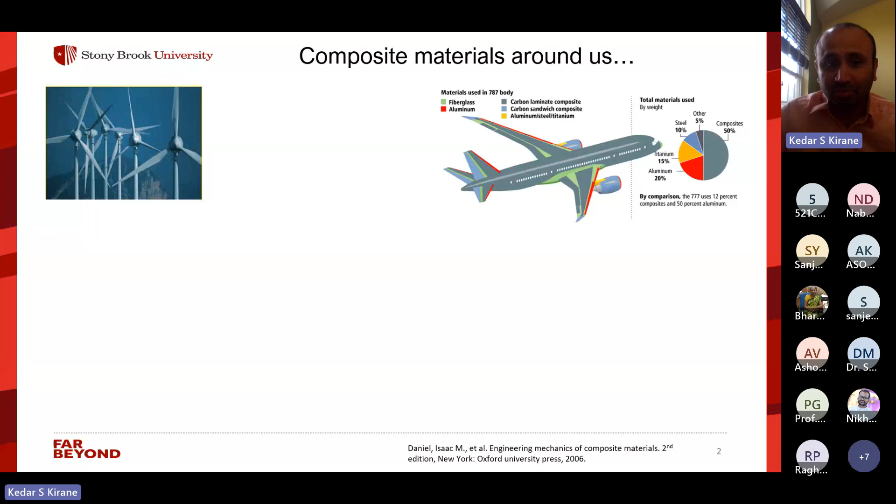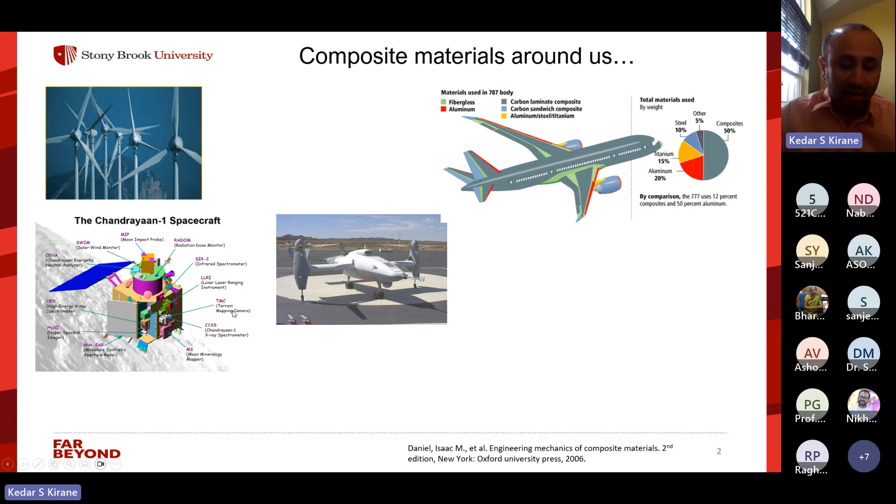We all know that today we are surrounded by fiber reinforced composites in many applications, like wind turbines. In the Boeing 787, actually 50% by weight is composites today. A lot of aircraft, the space science field, also use a lot of composites, as well as the automotive industry, boats, recreational applications, and defense applications. The main reason for that is composites are very lightweight, yet at the same time strong and stiff. So they have excellent mechanical properties, which has led to their widespread application in all these various fields.

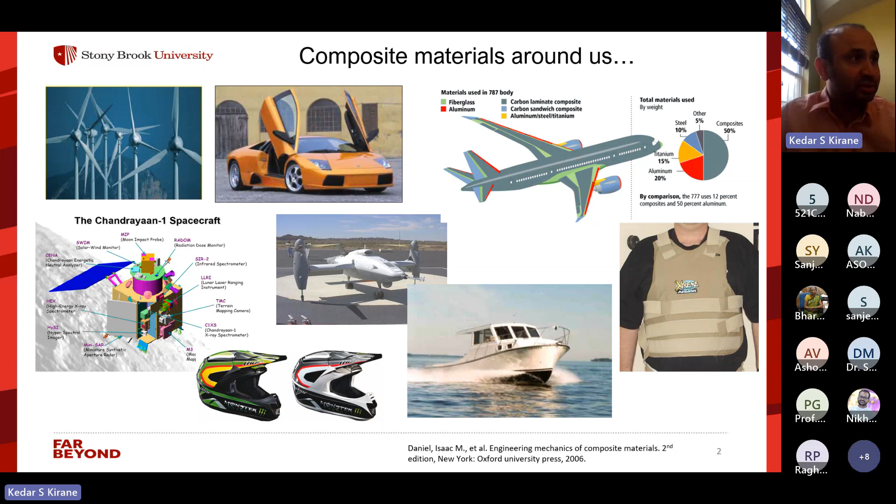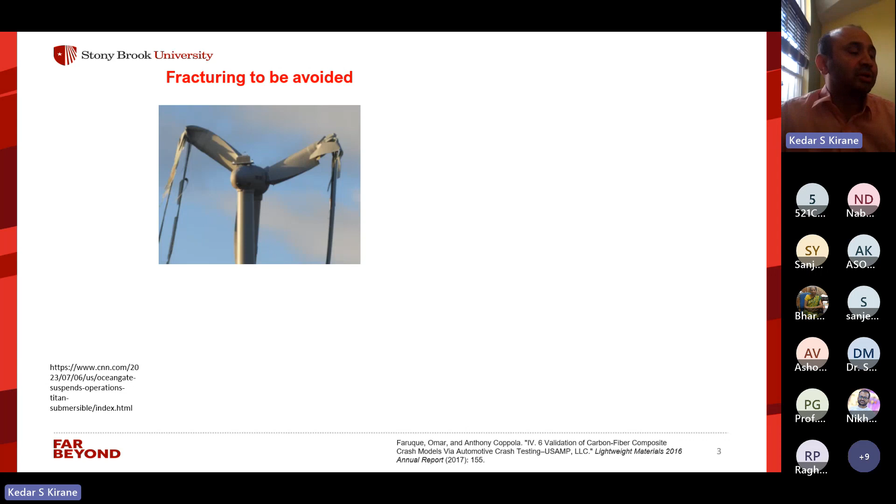But the main thing to realize is that we have to understand the fracturing behavior very well, and not only understand it but also be able to predict it, so that we can avoid failures. A recent example which may resonate with everyone is the recent failure of the OceanGate Titan submersible, which was made mainly from a carbon fiber reinforced composite, and it ended up a big disaster—several people died. So these are the things that need to be avoided.

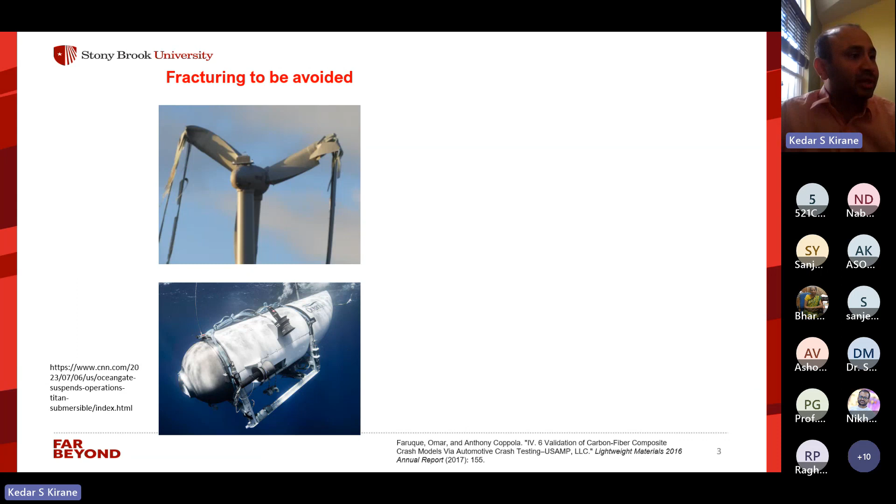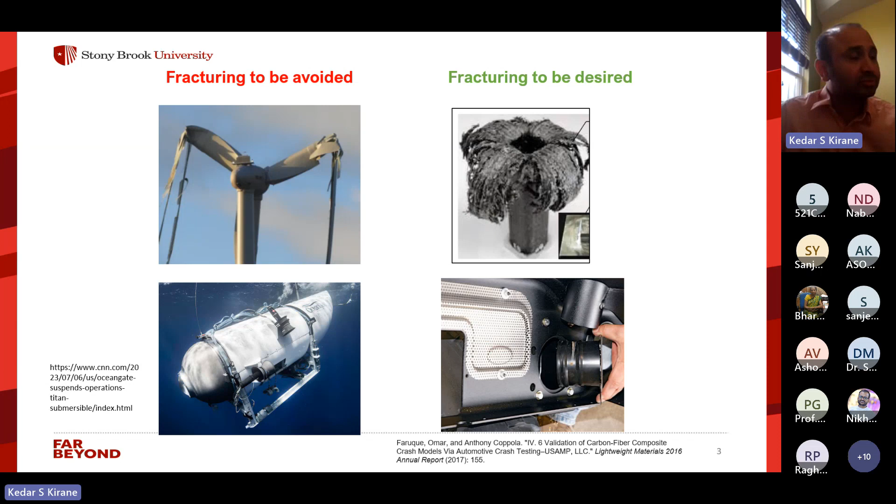So a little bit more about the OceanGate. There are many articles out there in the media, and a lot of speculation about what went wrong. I will just briefly try to discuss the main points here.

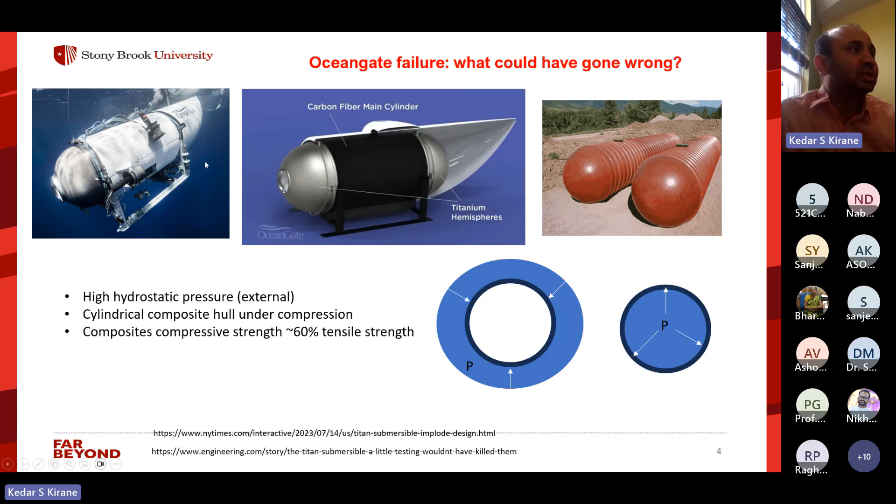So in this design, it was a bit of a new concept. Conventionally these kinds of vessels are made from a titanium alloy, but the company OceanGate decided to make it with a carbon fiber composite instead. The overall structure had a main cylinder at the center made from the composite, with epoxy matrix and carbon fiber reinforcement, and two titanium end caps, giving the overall shape shown here.

A lot of people believe the problem with this design is that while composites are great for many applications involving mainly tension, in designs where most of the stress is compressive, they may not be a great choice. To explain, look at this pressure vessel image. If there is pressure inside, everything is under tension, and for these applications composites work great - they're lightweight with high tensile strength, no problem.

But if you reverse it, pressure from outside to inside, as was the case with OceanGate, the entire structure is under some kind of compression, not uniaxial but multi-axial compression. That is often a limiting factor for composite design, because they consist of long fibers, and when these are compressed, they tend to fail by a micro-buckling instability. That's what I'll talk about mostly today.

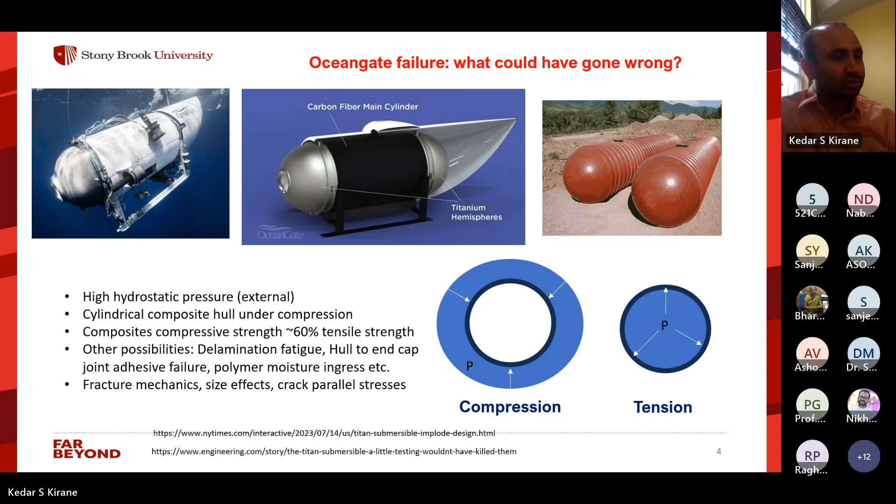Composites are generally made into lamina, or layers, which are then stacked with different orientations. Each layer is most commonly a unidirectional lamina where all fibers run in one direction, making it very anisotropic. To mitigate this anisotropy, it's common to use layers running in different directions, for example 0, 45, minus 45, 90. Overall, this stack, called a laminate, has a quasi-isotropic behavior.

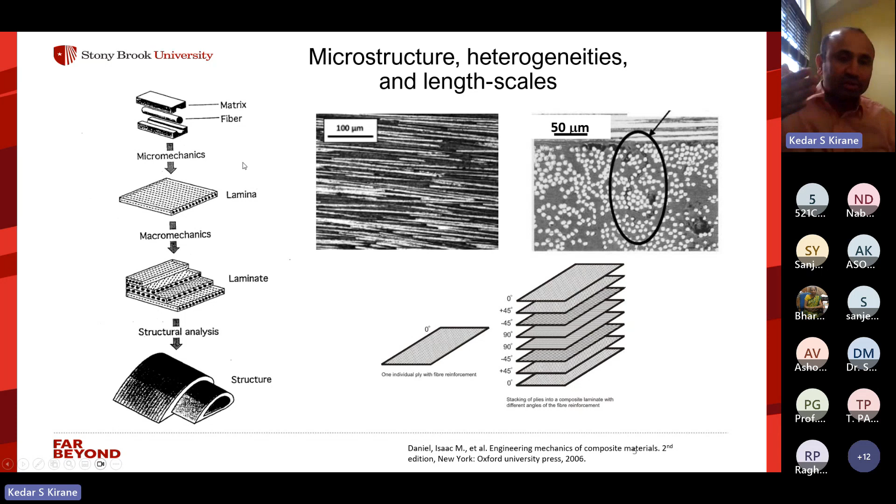But this layering also leads to another kind of heterogeneity because it's still joining dissimilar layers. So there are several length scales involved, all the way from the individual constituent level with matrix and fiber, to a single layer, to a stack of layers used in structures. An important thing to understand is how failure happens, and how it scales as we go from smaller to larger length scales.

One important point, probably the most important in understanding this scaling, is the so-called quasi-brittleness of composites. Failure can mainly be of two types: brittle or ductile. When brittle, at a sharp crack tip, damage is confined to almost a point - negligible in size. For ductile materials like metals, there's a plastic zone that is not negligible. But quasi-brittle materials such as concrete, rocks, and also fiber-reinforced composites have a damage zone at the crack tip whose size is not negligible compared to the size of the specimen itself.

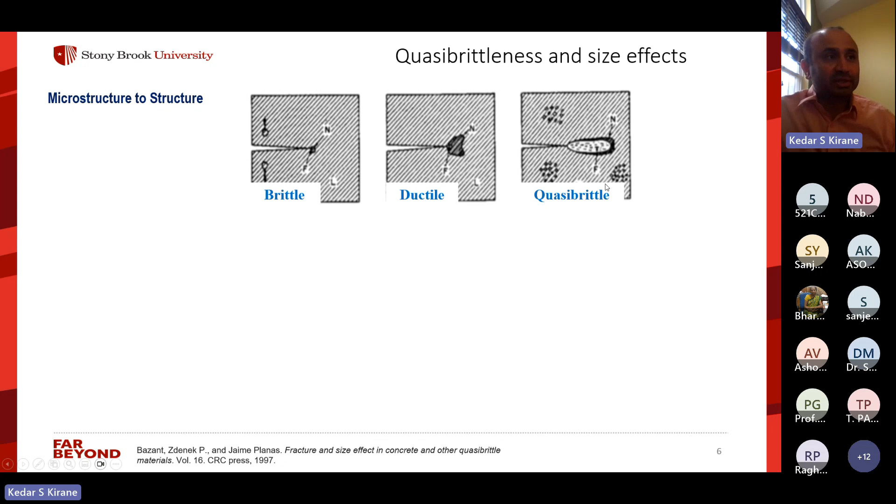Understanding this process - this is called the fracture process zone. The process zone size is usually more or less constant, so depending on the length scale we are operating at, the role played by the process zone increases or decreases in importance. For very small scales, probably everything is the process zone, so then it is extremely important. For very, very large sizes, the process zone is negligible, so then the behavior can be classified as brittle. In this intermediate range, maybe laboratory dimensions, the process zone is of moderate size but still not negligible, so it plays an important role. Understanding this transitional role is very important, not only in modeling it, but also in characterizing the fracture behavior.

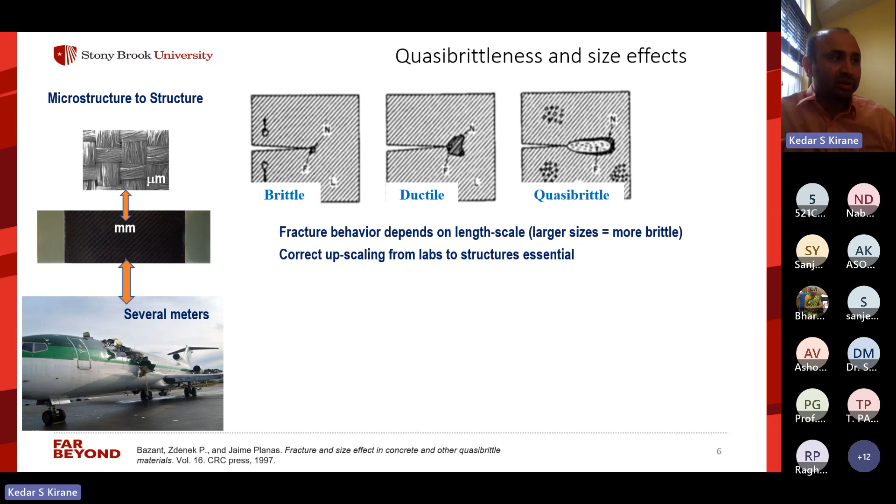So essentially the behavior depends on the length scale. Larger sizes are more brittle, and so the scaling from labs to structural size is very tricky. Now, one of the things that happens with changing size is that the stability of the post-peak behavior changes. For example, smaller specimens are often more stable in the post-peak region, and larger specimens become more unstable.

There is a very important concept called the size effect law, which basically says that larger structures have smaller strength, nominal strength. This is not the material strength - material strength is a constant, but the specimen strength, which is the total load divided by some kind of nominal area, that decreases with increasing size.

This is also the prediction of linear elastic fracture mechanics, of course. But if you consider linear elastic fracture mechanics, which applies to purely brittle failures, the scaling of strength versus the size D plotted on this will show almost a linear plot with slope of minus half. But what happens because of the process zone is that the scaling deviates from this straight line. This deviation is described by this empirical law, called the size effect law, which was first developed by Professor Bazant, who was also my PhD advisor.

This is the well-known form of the size effect law, where sigma n is the nominal strength of the specimen, and d is the size of the specimen. It has two constants: one is sigma 0, which represents the strength at zero size, as d goes to 0, and d0 is a length scale parameter related to the size of the FPZ. So when you have a non-negligible FPZ or process zone, you have this transitional behavior of the strength size effect, and when the specimen size becomes really small, this size effect vanishes.

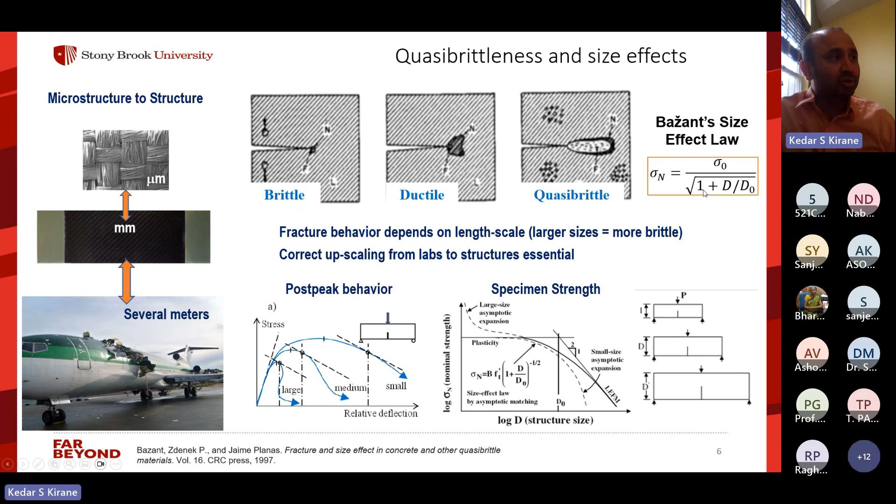Understanding the size effect is really, really important for most materials, including composites. Now, a little bit more about this size effect law - this is basically how it looks, where the strength decreases with size, and in this intermediate region a length scale has to be introduced. It is not self-similar, and then at very large sizes it becomes what LEFM, or linear elastic fracture mechanics, describes.

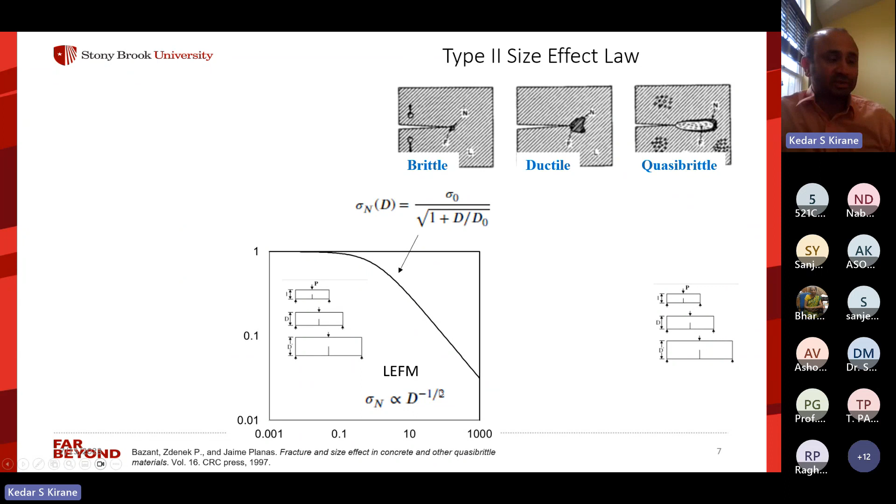Now, an important consequence of this is that if you are in this region - the x-axis is size D - if you test the specimen in the lab for fracture toughness, you will actually see that the fracture toughness becomes size dependent, or appears to be size dependent. This can easily be seen by just rewriting the size effect law in terms of fracture toughness, and you can see that this becomes a size dependent equation for Kc, the fracture toughness. It actually increases with size, and only for very large sizes does it become constant, which is what fracture mechanics tells us - that fracture toughness is a constant parameter.

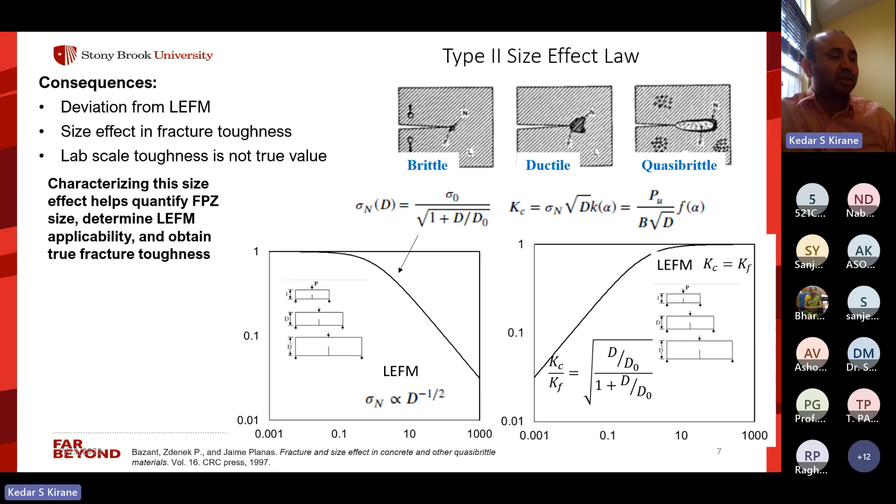So if you do a test for a size somewhere in this intermediate region, that fracture toughness will not be applicable to large sizes or small sizes. It is crucial to understand the scaling, and then to also understand what is the large size true fracture toughness. Characterizing the size effect is very useful in identifying the size of the process zone, for what sizes linear elastic fracture mechanics can be applied, and the true fracture toughness can be calculated using these equations, where the parameters sigma 0 and d0 are the parameters of the size effect law. So this is one of the main points, and I'm not sure if several applications do consider this scaling effect in fracture toughness.

So this is one of the main areas of research today in composites. Now there are other size effects also. For instance, there is something called type 1 size effect, which occurs in specimens failing in the presence of a stress gradient. Then there are size effects in fatigue crack growth also.

They are very well established for concrete, but they have not been studied for composites at all. Then there are size effects in the probabilistic distributions of strength, and these are the ones that I will not really talk about. But when someone says size effect, I think this is probably the most talked about one, the type 2 size effect, which occurs in the presence of a sharp crack.

So that is one of the main points today I want to make, that understanding this size effect is quite crucial, especially when you have various heterogeneities and you scale up from the lab to the structural scales.

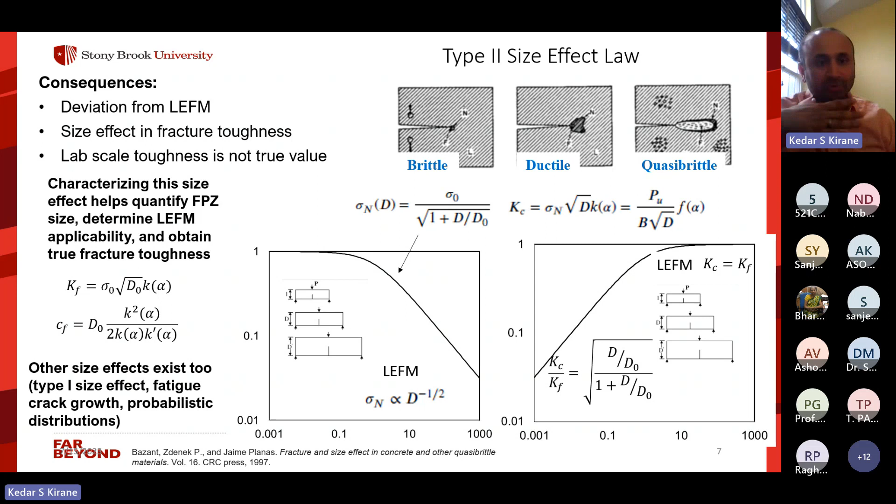On the other hand, if it is a compressive load, the failure mechanism is completely different, and it occurs by formation of a fiber kink band, which I will elaborate on in the next slide. There is also, of course, overall layers can separate within a laminate, so that is called delamination.

And then under compression, there are actually many modes possible, like shear failures, interfacial failures, fiber crushing, interlaminar failures, and kink band failures. So this fiber kink band is one of the most commonly observed failure modes under compression.

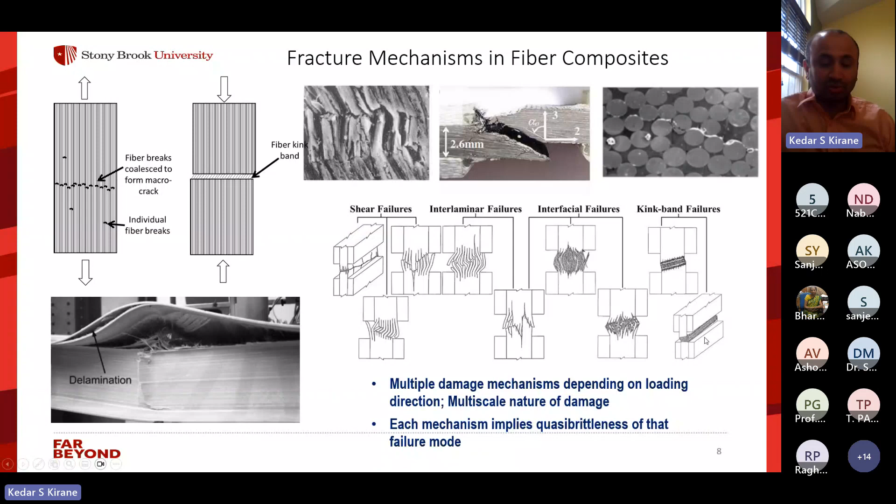So these kink band failures in composites, they actually happen because it's a two-scale phenomenon. It's a multi-scale phenomenon, and it is quite complex. Characterizing it and modeling it both are quite challenging.

So what essentially happens, in the simplest terms, is that fibers are very long and slender, and in the composite there is polymer around it, so it kind of holds everything together, the polymer. But usually there is some kind of misalignment between the fiber direction and the loading direction.

And so because of this, what happens is locally somewhere in the matrix, it gets damaged under shear. And when there is shear damage in the matrix, the fibers kind of lose their support from the adjacent polymer. And this triggers, or enables, a micro buckling type instability in these fibers.

So first the fibers will bend a little bit like this as shown here. And then because the fibers themselves are quite brittle, they will kink. And they will kink at two locations, because if you imagine a fiber bending like this, it will come back to be straight, so there are actually two inflection points, if you note. And so then they will kink. So this kind of band will develop, and this is called the fiber kink band.

It happens only under compression. And sometimes multiple kink bands can also develop depending on the geometry. And the key characteristic is that when the kink band happens, this happens at peak load, the kinking, the load drops, and then the load actually becomes constant at some non-zero value.

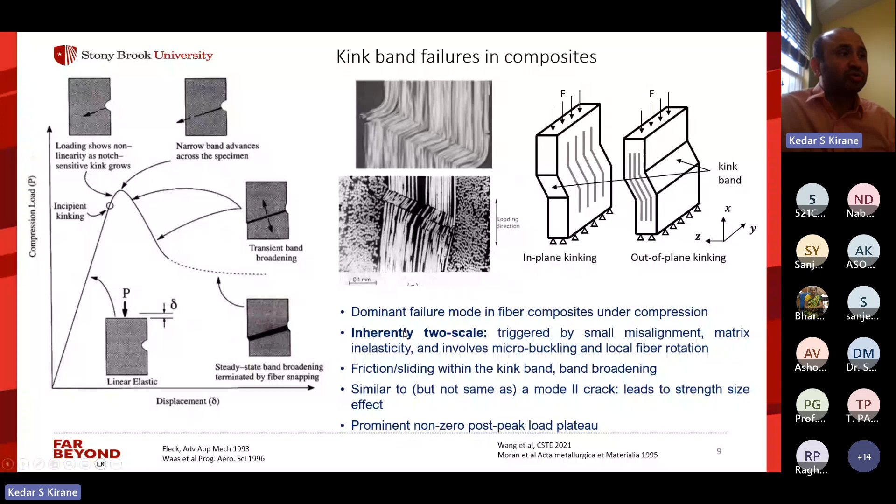So to be able to predict this in models, the model needs to account for all these in a meaningful way. Today I will talk about a model that we have developed recently to capture these kink band failures in composites. The approach that we adopted is continuum damage mechanics.

Now in the literature you will find many models to predict fracture. There is, of course, starting with the basic cohesive crack model. There is XFEM, the extended finite element method. There is damage mechanics, continuum damage mechanics, which we have chosen. There is the phase field model, and so on. But each one has its own pros and cons.

But as far as the compressive failure of composites goes, by kink band formation, the damage mechanics approach has probably been the only effective way of modeling it. One of the main reasons is that the direction of the kink band is not known a priori, so it has to be a prediction from the model. This approach is most relevant to this kink band failure.

So what essentially happens in this approach is that we introduce a state variable called the damage variable D. When D is 0, it implies that the material is undamaged, and it slowly evolves to a value of 1 when the material is fully damaged. The failure is kind of smeared.

So if this is a crack, it is represented by a band of smeared damage, and in this band D will go from 0 to 1. When it goes to 1, its stiffness is lost. So essentially, the formation of a crack is likened to the loss of stiffness of that material—it's smeared in a region whose stiffness is lost.

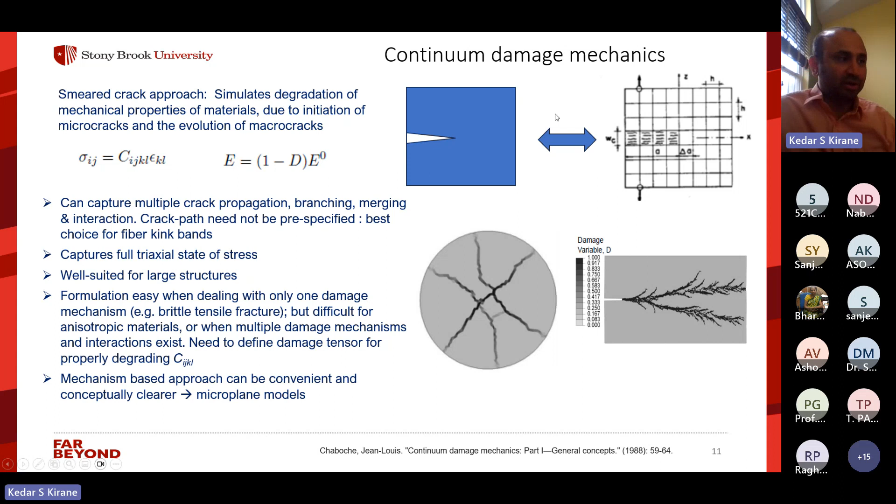Now, before I talk about the model itself, an important topic is the regularization, or the length scale, which is needed to capture this softening damage. I'm sure we all know that whenever we capture softening, the results are always going to be mesh dependent, because if you have localization, it will localize in the band of, let's say, one row of elements, and the rest will unload.

So if your element size keeps decreasing, the localization will keep happening in a smaller and smaller region, and so the results become mesh dependent. This is a well-known problem, and the way to overcome it is to introduce some kind of length scale to the model.

The simplest way to do that is to make the energy dissipation per unit area a function of the element size. So if you look at this plot, stress versus strain at a single material point, this area is small gf, the energy dissipated per unit volume. We can relate it to the fracture energy of the material through a length scale h. So big Gf is actually h times small gf. And this h, if we make it equal to the element size...

...that means if we change the element size, we have to adjust the stress strain law so that big Gf doesn't change. This kind of element-dependent adjustment of the post-peak softening law is called the crack band theory, and it is often used in conjunction with continuum damage mechanics, this smeared cracking approach. What it does is basically make the element size the length scale.

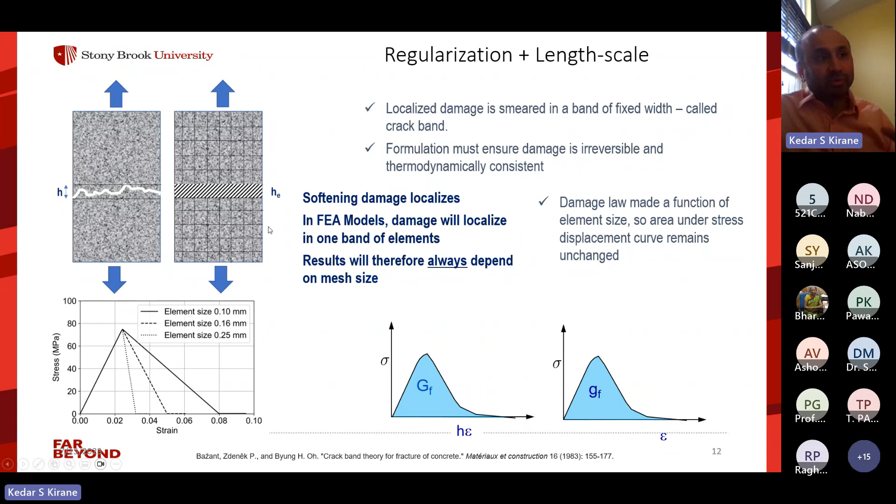So going back to the constitutive model, first I'll give a brief overview of what this microplane model concept is, and then discuss how we adapted it to compressive failures, the kink band failures. The concept is simple. In usual continuum damage models, the strain tensor is related to the stress tensor through the fourth order stiffness matrix C_ijkl, which becomes very complicated when several damage mechanisms are active at the same time.

So in microplane models, what is done is you imagine that at a given material point there are several microplanes—imagined planes within the material microstructure. This is kind of analogous to crystal plasticity type models used in metals, except in crystal plasticity the slip planes are well-defined, whereas these microplanes are randomly oriented.

What is done is you project the strain tensor onto these microplanes and get the strain vector. You define the constitutive law corresponding to individual damage mechanisms in terms of these stress-strain vectors. Because these are vectors, it becomes very easy to define various damage mechanisms like tensile cracking, frictional slip, local shear, and things like that.

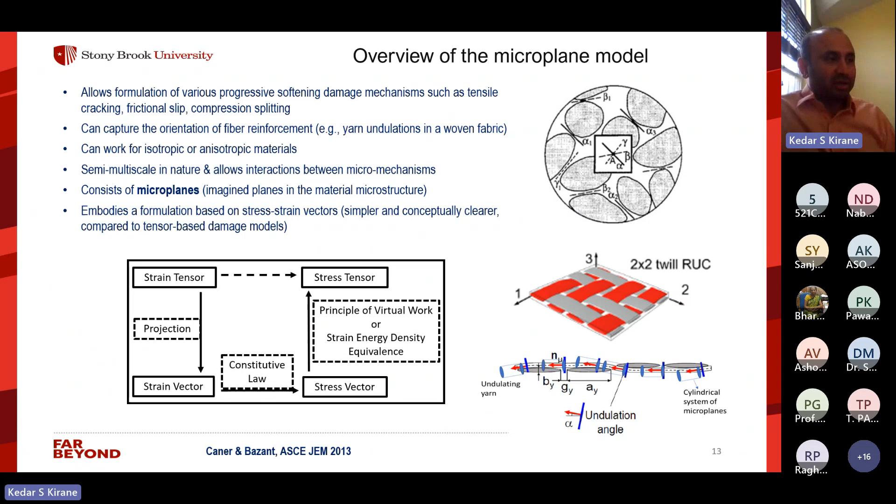So basically the structure goes like this: you project the macro strain onto various microplanes. This is, of course, for concrete, but we adapted this approach to composites, which I will show later. So you get these strain vectors, one normal strain vector and two shear strain vectors. Then using whatever constitutive law, you get the stress vectors, and then you homogenize these stress vectors using the principle of virtual work to get sigma_ij, which is the stress tensor.

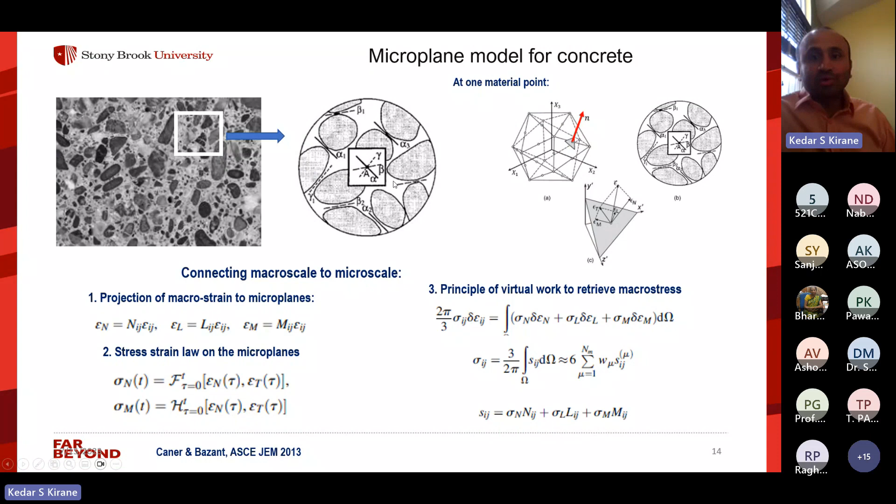And so for doing this, you need to assume some kind of volume. So you imagine that one material point is basically a sphere, and this integration occurs over the surface of the sphere. This approach of assuming it is a sphere works for isotropic materials because the microplanes are then oriented randomly, and when you homogenize everything, you get an isotropic response. So obviously this approach won't work for composites.

So what we did was we developed a new kind of microplane model: the cylindrical microplane model. Instead of the sphere, we introduced a cylindrical arrangement of these microplanes, all imagined at a given material point. So if you imagine one unidirectional lamina with fibers running in one direction, we assume a cylindrical system of microplanes exists, consisting of several planes along the surface of the cylinder and one lateral plane, like this.

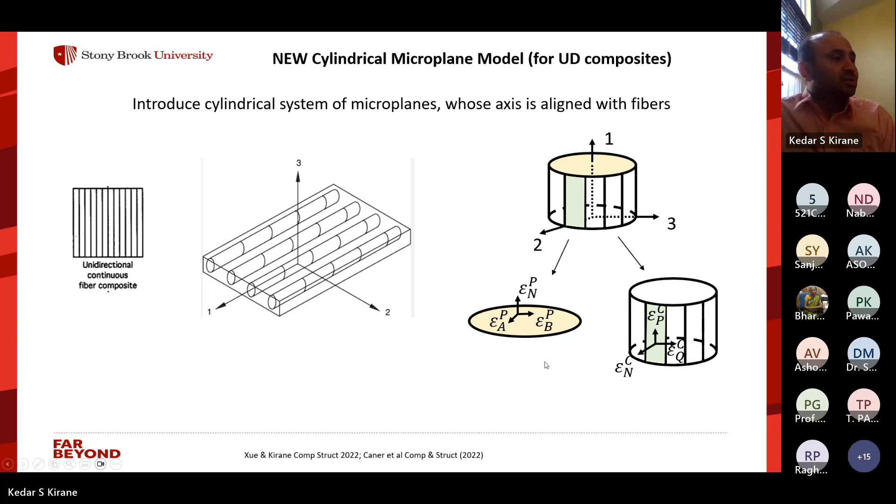So then what we do is, instead of the principle of virtual work, we define the strain energy density at a point. This can be done by introducing three mutually perpendicular microplanes at that point instead of many, just three mutually perpendicular ones. And we can show that the entire strain energy density of a transversely isotropic material can be represented by three microplanes. We showed this in a 2016 Journal of Applied Mechanics paper, where we developed this so-called microplane triad model, three mutually perpendicular microplanes.

So in the cylindrical model, which we recently developed, we basically adapted this concept. The transverse plane of the cylinder is similar to one of these planes of the triad, and the rest of the cylindrical microplanes are then equivalent to the remaining two planes of the triad.

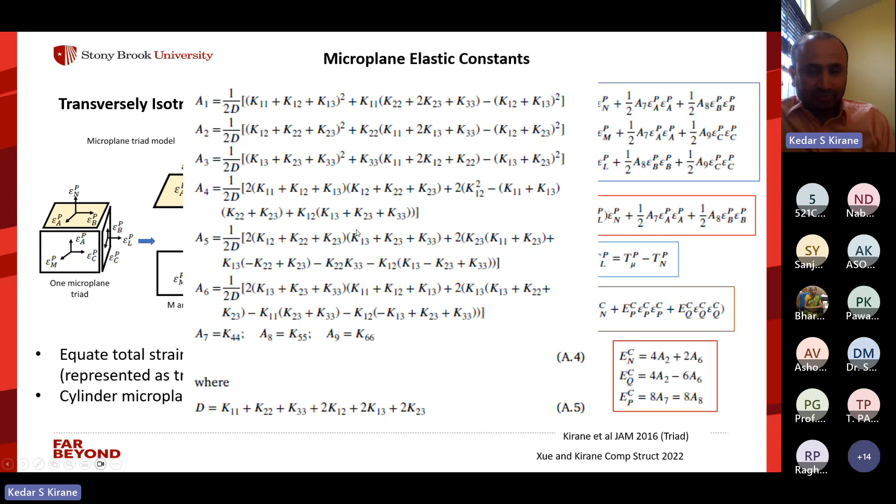So this is the framework of the cylindrical microplane model, where instead of a sphere taken for concrete, for composite you take a cylinder, and then you project a strain tensor onto these cylindrical microplanes, obtain the stress vectors, and calculate the strain energy density. Using that, you can calculate the stiffness tensor to get back the stress tensor. That is the overall approach.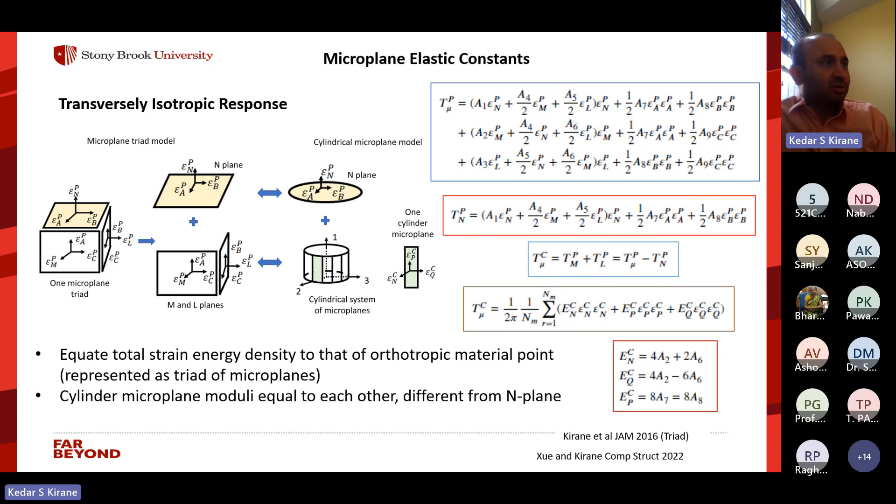And how we then capture the kink band formation is as follows. The hypothesis is that in the kink band, it is all shear localization, and that shear is parallel to the fibers, a lot of it. Because we have this cylindrical microplane system, we have easy access to the shear acting on the cylindrical microplanes, and we also have shear acting on the transverse n plane.

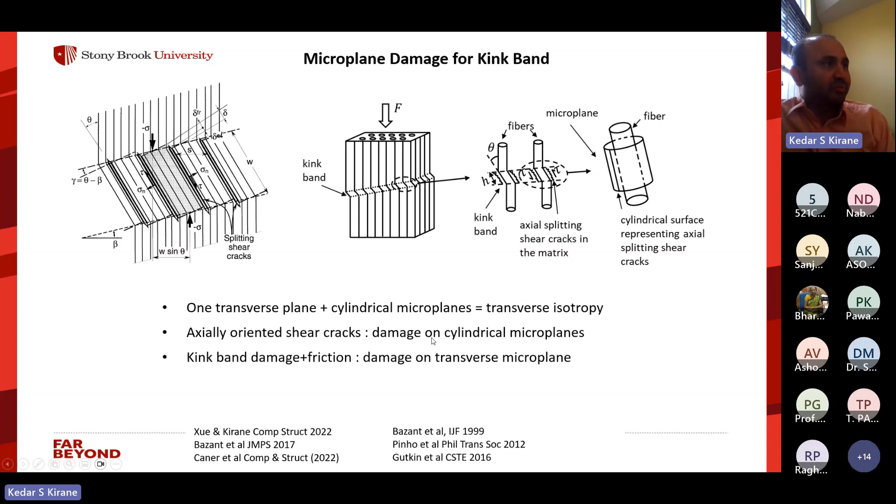So what we do is we just define a simple damage law, which is driven by the shear acting on the cylindrical microplanes and the n plane. And we use that damage to capture the overall failure of the composite. So that is one feature, simple damage laws on the cylindrical microplanes and also the transverse microplane. And the very important key feature is the orientation of the cylindrical system of microplanes.

Imagine that the kink band is developing in-plane. We can imagine that the overall loading is along the x direction, and one direction is the fiber direction. There is often usually an initial misalignment angle theta_i. So any local shear will add to theta and will end up involving more rotation. This rotation will further increase the shear, and it will keep accumulating. This is what leads to the shear localization. So in our model, we basically calculate this rotation and calculate this shear.

In each time increment, we solve for this angle, and once we solve for it, the system of microplanes is rotated accordingly. So in each time increment, the orientation of the cylinder is changing with local shear.

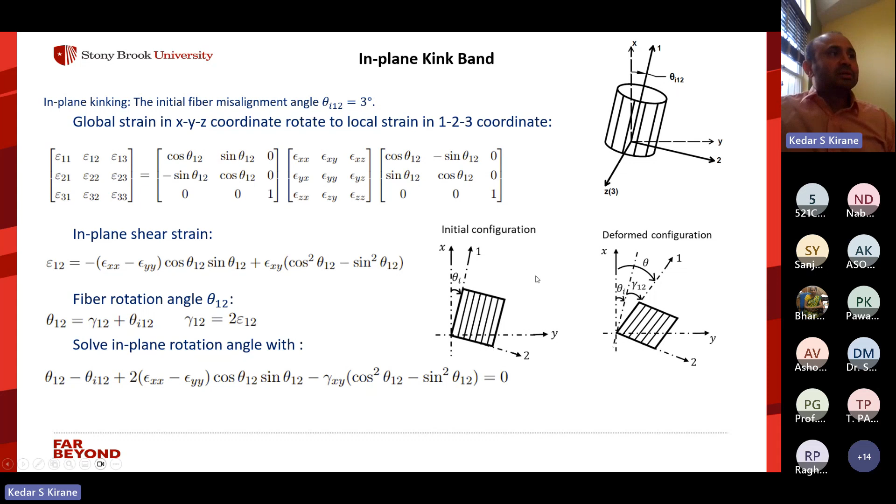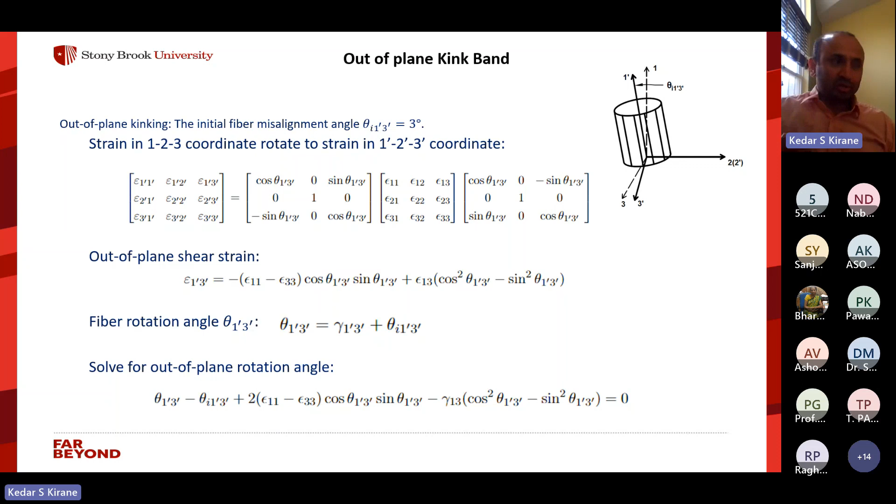This is for the in-plane system. There is also the out-of-plane possibility, so we can do the same for that. This is a key feature: calculating local shear and then adding it to the initial misalignment angle to keep increasing the local rotation of the fiber. Then we have damage laws on the cylindrical microplanes and the transverse planes.

We actually have two versions of the model possible. One is if the matrix behavior is brittle, we can capture it using a simple linear softening law, which again has to be driven by shear, because locally the failure is caused by shear. Now if the matrix behavior is ductile, we can have a trapezoidal damage law where there is some kind of plateau and then softening. This damage law is very simple, nothing complicated about it—it's just damage driven by local shear. And of course these parameters, the damage initiation and completion thresholds, have to be calibrated using test data. So it's either this linear softening or ductile trapezoidal damage.

The other thing is friction, and there are many ways to introduce it to the model. You can even do it indirectly within the damage law by stopping it at a point and keeping the stress constant—that itself captures the effect of friction. But we did it in a more physically meaningful way. There was a model developed by Ragueneau for rocks and concrete-type materials where they split the total stress into stress from damage and stress from friction. If D is the damage variable, the stress from the material itself decreases with increasing damage, while the friction stress increases with increasing damage, and when D becomes 1 that stress remains constant. So this feature captures the fact that stress does not go to zero when damage is complete—the material stress goes away, but the friction stress always remains. We adapted this feature in the microplane framework on the cylindrical planes as well as the transverse plane.

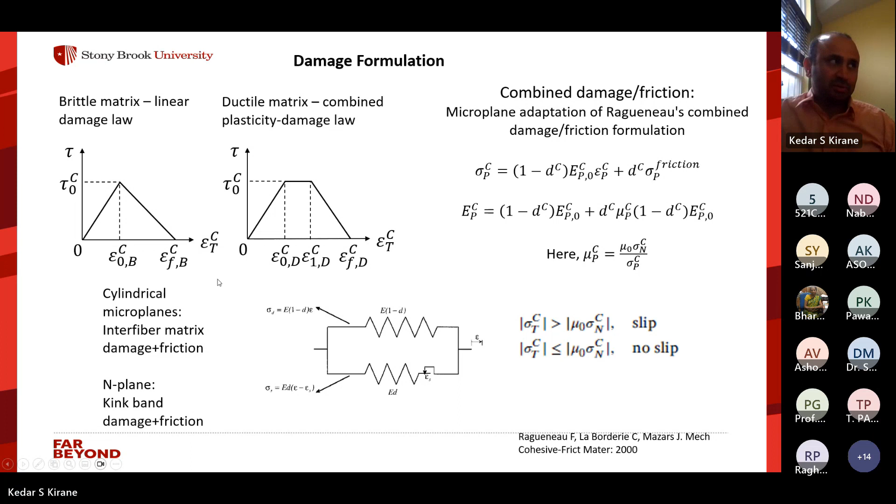So to summarize: we take the macroscopic strain tensor, rotate it by the angle theta, project it onto the microplanes, then check for damage—either linear softening or trapezoidal—and check for friction and calculate the friction coefficients. Using this, we update the elastic moduli if there is damage, and then update the stiffness matrix to get the stress tensor. Whatever the rotation is, it's updated again here, so the system keeps rotating.

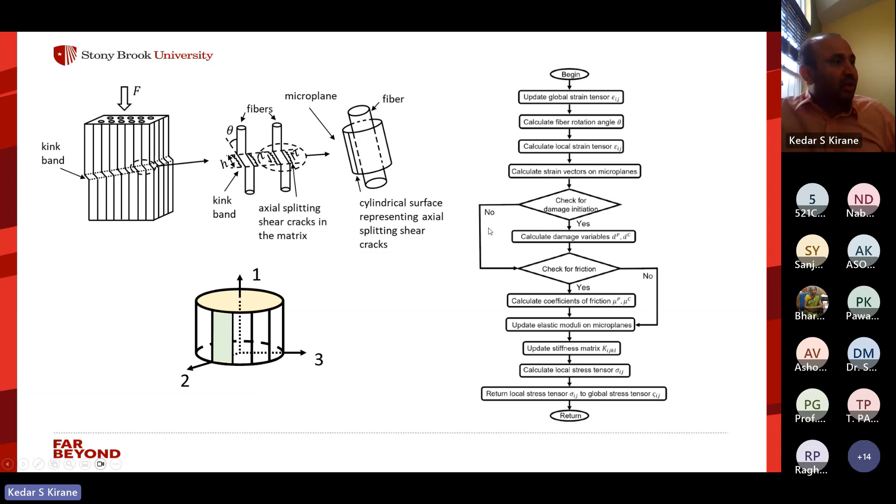Now for some results. We implemented this as a user material subroutine in Abaqus, and these are some of the results—initially a single material point evaluation of the model. At the bottom, we have the out-of-plane kinking version of the model. The load was applied as uniaxial compression in the x direction, and you can see that the application of compression actually leads to local rotation—so compressive loading causes shear. This is a result of only our constitutive framework embedded within it.

The same thing can happen for in-plane kinking. The shear strain is the 1-2 shear strain, and here it is 1-3. Another thing is you can look at the stress-strain plot: it goes up, has a peak, and then decreases but doesn't go to zero—it approaches the friction stress and remains constant. So we have local rotation as a result of compression, and we have combined damage and friction, leading to this kind of stress-strain plot where the stress doesn't go to zero.

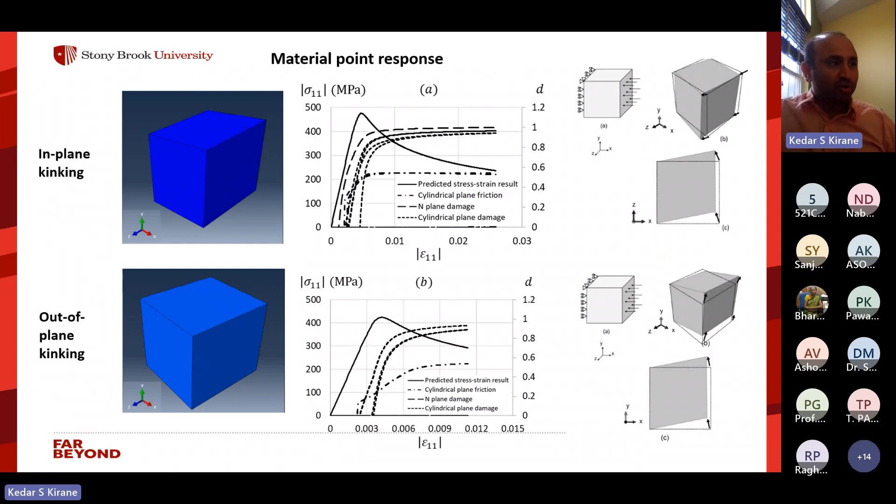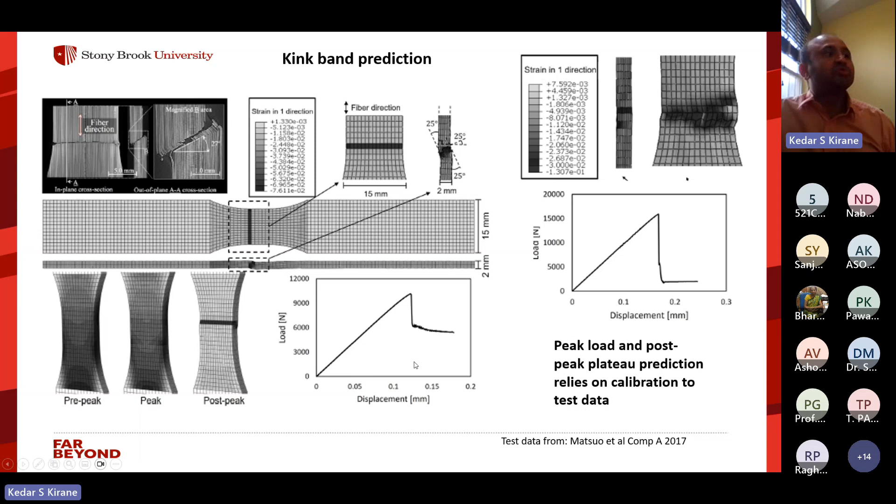You can see that the load displacement plot is also consistent with experimental observations: linear, reaching a peak, sudden drop, and then load remains non-zero for a long time. This is out of plane kinking. We didn't have any experimental data on the same material for in-plane kinking, but we kind of enforced in-plane kinking to happen, and we can capture that also in case it happens. But under loading aligned with the fibers, the more preferred form is out of plane kinking, at least that's what the observations suggest.

Now the load versus displacement curve for another test set of experiments we modeled. These were notched compression tests, and the solid line is from the model while the dotted is from the experiments, and the agreement is pretty good. In fact, I don't think there are any other papers which show this kind of agreement in terms of the peak, the small drop which represents the formation of the kink band, and then this plateau, which shows local rotation, localization of the shear in the kink band, and frictional sliding in the kink band. So all these features, our two-scale approach of the microplane modeling strategy, it seems to work very well.

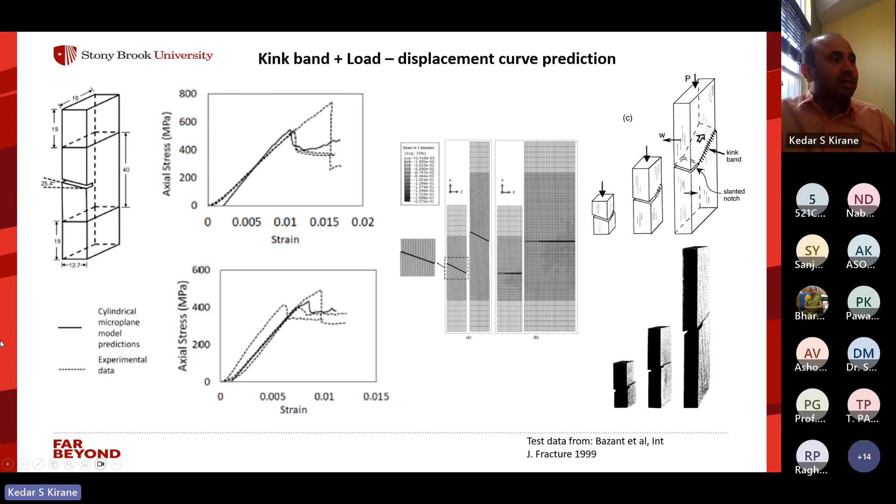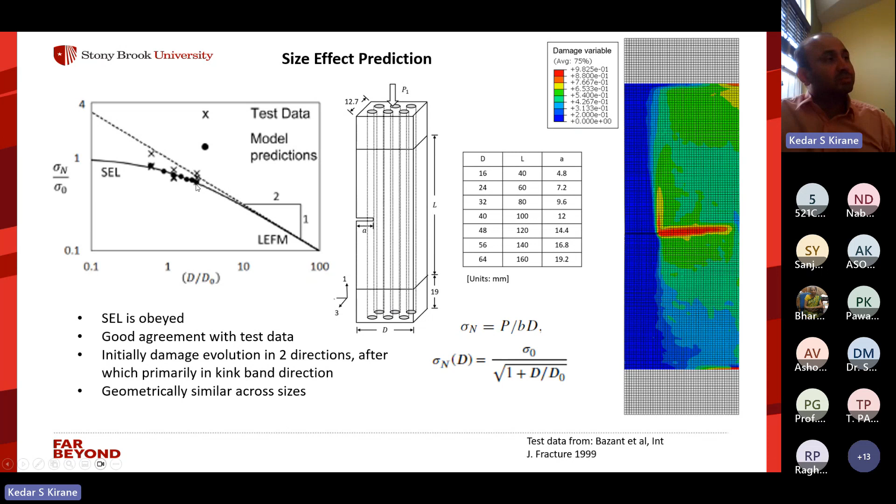Going back to the size effect I mentioned, the experiments had shown that even this compressive failure shows the type 2 size effect type behavior, and we simulated it, and the model also predicts it. So for sure, this is the quasi-brittle failure mode. If you calculate the fracture toughness from one particular size, it is going to be size dependent. So even for kink band formation, this size effect is going to be very important, and we can see that the model can predict and capture the size effect correctly. It obeys the size effect law, and it also matches the test data. Again, this kind of agreement has not been shown in literature by any other model, or they have probably not even checked for size effect. So it's pretty pleasing that it can match this well.

Then we did some other sensitivity studies, and essentially we can see that it can capture the effect of misalignment angle—higher misalignment angles give lower strength. We also were able to quantify, using the model, how much effect friction has on the overall behavior, and we can see that it is actually quite significant. If you run the model without any friction effects, the peak load decreases, and the load after the kink band also decreases a lot. So the friction in the crack faces plays a very important role in compressive failures, and that also needs to be included in the models.

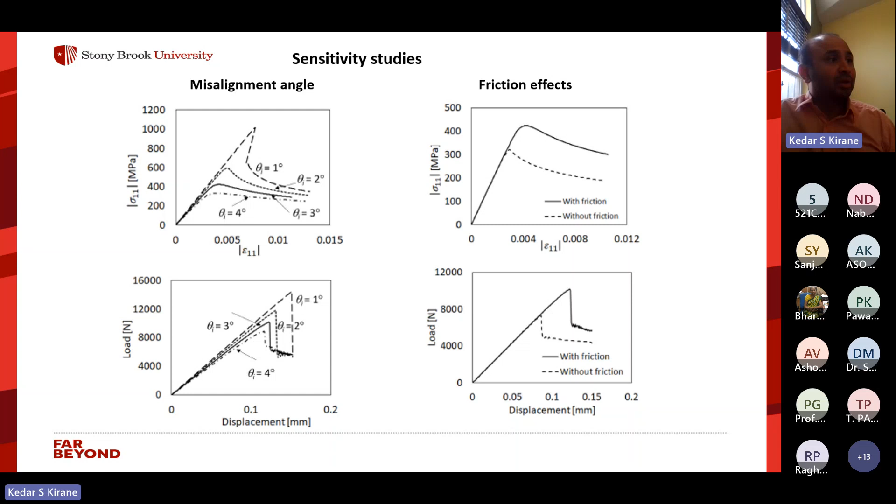So to summarize the microplane model: it is basically a new formulation with two length scales, and its hypothesis is that failure is triggered by interfiber shear in the direction parallel to the fibers. It has combined damage and friction, and it captures local fiber rotation, so it can do both in-plane and out-of-plane kinking. It was able to capture very well the failure geometry, the local fiber rotation, the kink band localization, and also this post-peak plateau in the load displacement plot. Most importantly, it was able to capture the size effect. So of course this is not a complete model yet, but it has big promise, and it can capture all these features, so it can potentially be applied to structural applications to predict failure loads if calibrated appropriately.

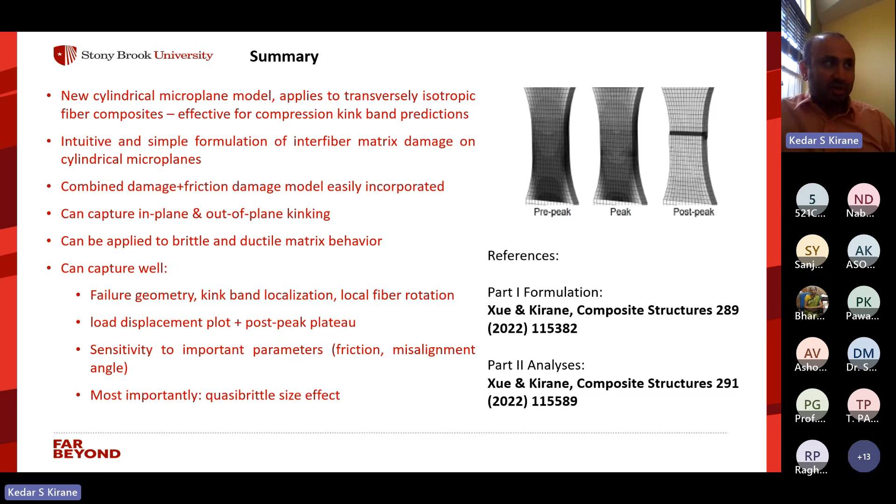Which brings me to the next and final part of the talk—there are still some outstanding challenges in this approach. One of the things which is very unclear is what the fracture energy is. We talked about the size effect, but the fracture energy which really governs these kink band failures is not the same as the mode 2 fracture energy. It's a different fracture energy, and we don't know how to characterize it unambiguously yet.

But there was some work done by Professor Bazant in the 90s, where he theoretically showed that you can relate the fracture energy associated with the kink band, which we call GB, to the mode 2 fracture energy GF through an expression, where W is the width of the kink band and S is the spacing of the tiny cracks which form axially within the kink band, driven by shear. In our cylindrical model, we exactly have these kinds of axial cracks. Of course, we don't have the spacing—it is all smeared at one material point. But our model is essentially based on this idea.

But this still remains to be seen whether in fact this expression is valid, from experiments. So the fracture energy relevant to the kink band is still not clear whether it is related to the mode 2 fracture energy by this expression, or is it something else. So this is one open challenge still for us in this area.

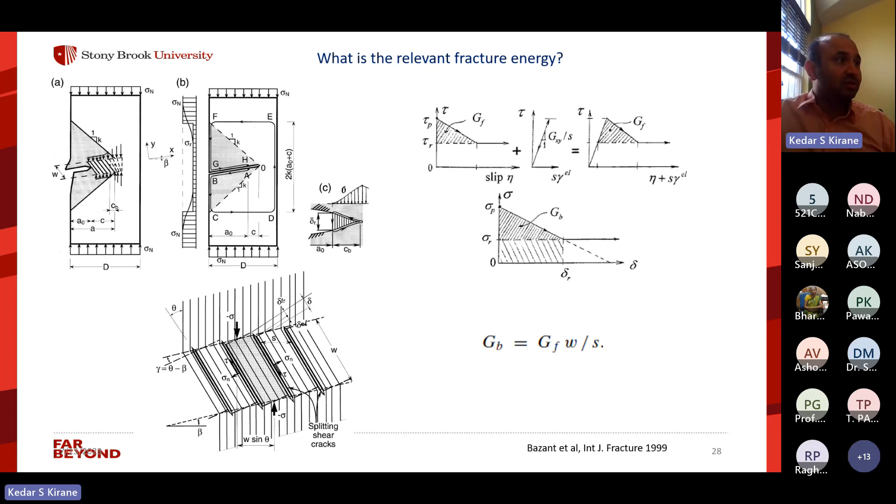The other thing is we only considered uniaxial compression in real applications, like I showed the OceanGate. There is obviously multi-axial compression, and what happens in those loading situations is more complex. Even in those cases, a kink band develops, but it's neither in plane nor out of plane. It develops at some arbitrary angle in a 3D sense, as I tried to show in this schematic. So it's a 3D oriented kink band, and we are trying to model this right now under general multi-axial loading by combining both in plane and out of plane formulations into one. But this is still a work in progress.

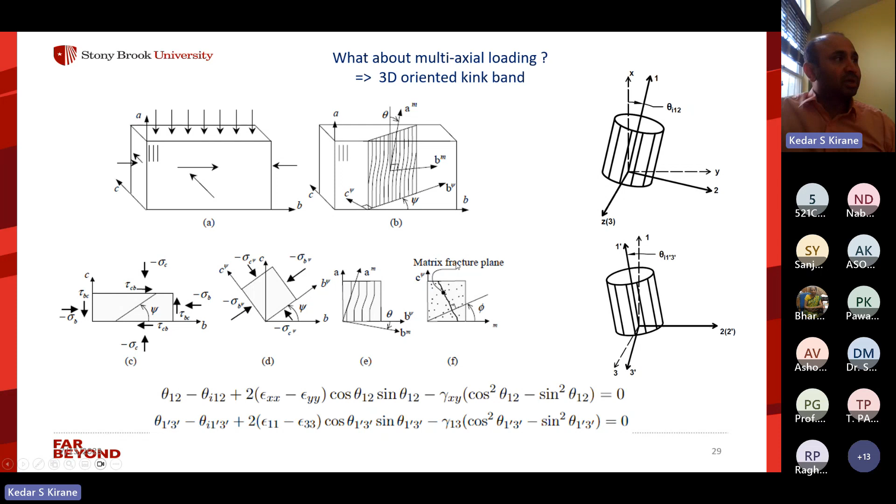The other thing to consider is that if there is compression transverse to the fibers, then there is a transverse compressive failure whose mechanism is different from kink band formation. That is purely matrix shear failure, so that has to be incorporated on top of the kink band formulation. This is what we are currently working on, but it's a work in progress, not complete yet.

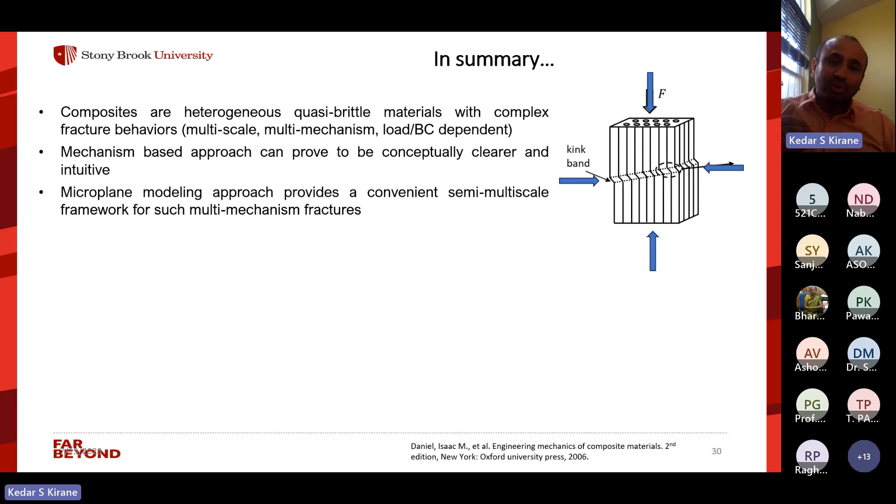So to summarize all that I said: composites are basically heterogeneous quasi-brittle materials with complex failure behaviors. It's multi-scale, with several failure mechanisms which depend on loads and boundary conditions. So for these purposes, a mechanism-based approach in damage models can be more effective, and the microplane approach provides a good framework for this. It's a semi-multi-scale framework, allowing consideration of two length scales, the lower length scale and the macro scale length scale.

Another point to note is that we have to distinguish between the FPZ length, which is related to the fracture energy in the model, and the strength. There is also the FPZ width, which is necessary in models to get rid of mesh dependence, or achieve mesh objectivity. Both of these lengths have to be included in, or accounted for in, the model.

Size effect considerations are equally important, and models should be checked for their prediction of the size effect, because if they only match one size, there is really no guarantee that they will match other sizes. So if we can check at least three sizes, we can have some confidence in their scaling predictions, and then applying them to larger structures would be more reliable.

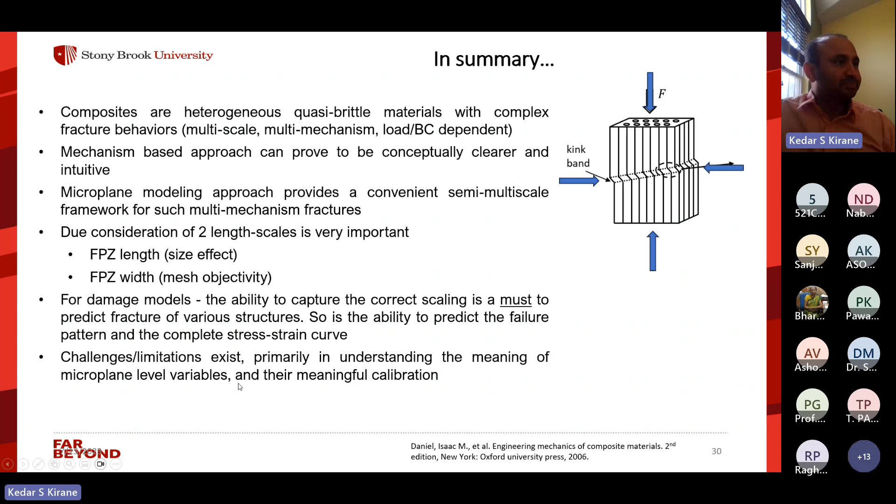Of course, there are challenges and limitations, but ongoing work is there to address these. These are various ongoing areas in composites technology, but I will probably skip this for now, and I will stop, and welcome any questions you may have. Thank you.

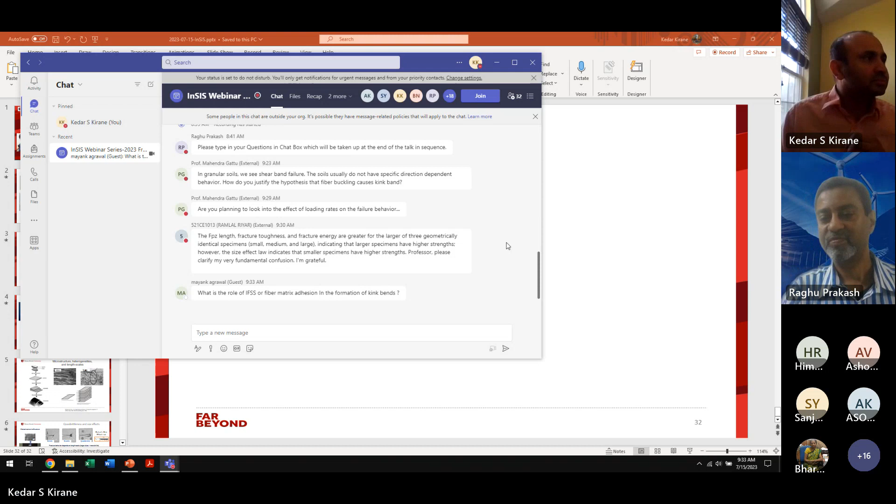Let me open the slide. If you see the definition of fracture toughness, looking at the equation, Kc equals sigma n times square root of d times k alpha.

If you flip it in terms of sigma n, the d goes to the other side in the denominator. On the other hand, if you start from the size effect law, sigma n equals sigma 0 divided by this term. If you substitute this for sigma n into the equation for Kc, you can derive an equation for Kc showing that fracture toughness increases with size. So the decrease of strength with size is related to the increase in fracture toughness with size.

If we were in person on paper, I could show that you can derive this equation for Kc starting from the size effect equation—it's fairly intuitive. If you substitute Kc divided by square root of d k alpha for sigma n here, and solve for Kc, you get a size-dependent law. That's how the strength decrease can be directly interpreted as an increase in fracture toughness. I don't know if I answered the question, but that's how it basically works.

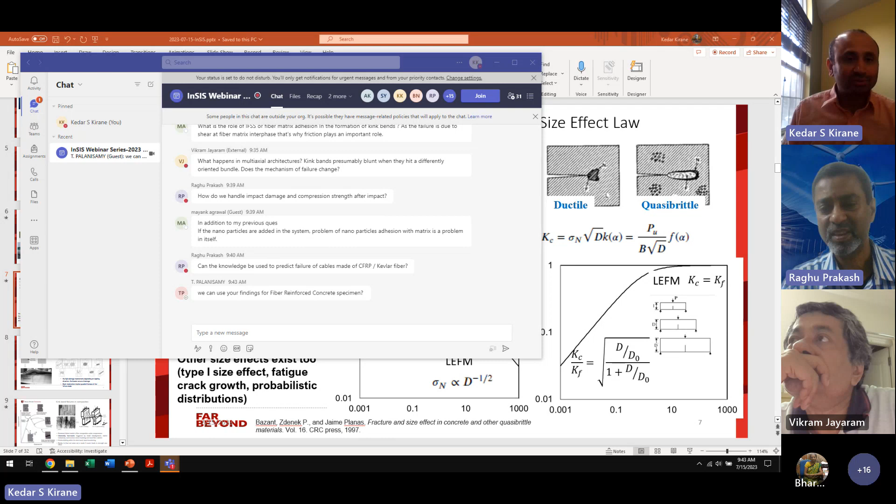Exactly. For those cases, you'd have to probably assume some kind of distribution of strengths in each fiber, like a probabilistic distribution. And if it's tensile, individual fiber break modeling is quite straightforward. But they all won't have the same strength, right? Exactly, that's one feature. If I look at it as an individual fiber contributing to the load distribution, somehow it doesn't match with the results you get on a built-up fiber bundle, braided and whatnot—it's always found to be lesser than what you'd get through any of these models. I would have to think about it, but maybe some microplane could be developed for this purpose.

There's one more question: can we use your findings for fiber reinforced concrete specimens? Sure, but in those cases the fibers have a different architecture than these composites. So the kink band mechanism doesn't really happen in fiber reinforced concrete—this mechanism of failure does not occur when fiber reinforced concretes are subjected to compression.

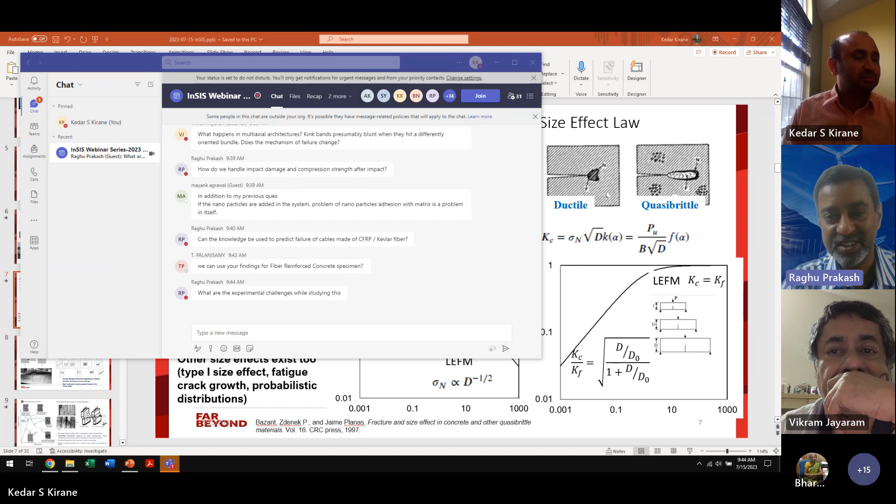I wouldn't say it is directly applicable to that. So what are the experimental challenges? I know you have done some experiments too, using strain gauges. We are doing this now for woven composites.

In woven composites, the fibers are not straight, they are undulating, and that creates its own effects on the compressive failure. One big challenge is stability of the experiment, because the failure is quite unstable. If your specimen thickness is small, you won't even see it properly, it will suddenly buckle. So you have to use thick specimens so you can actually see the kink band clearly.

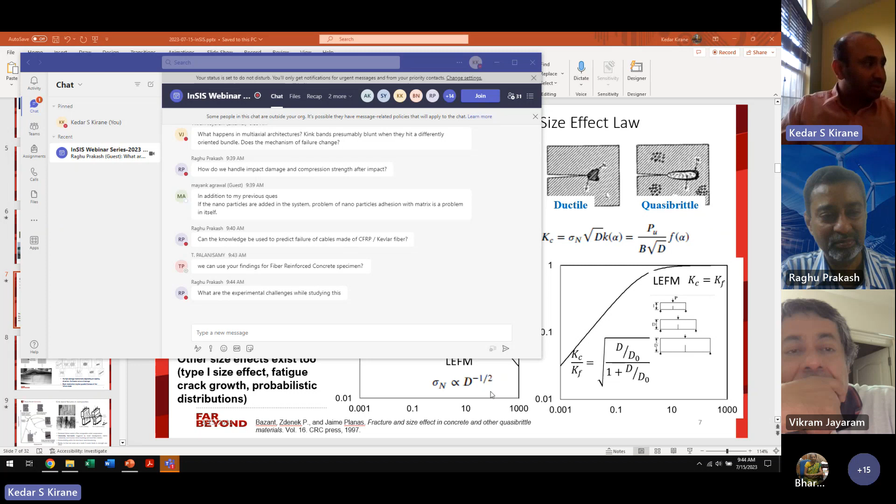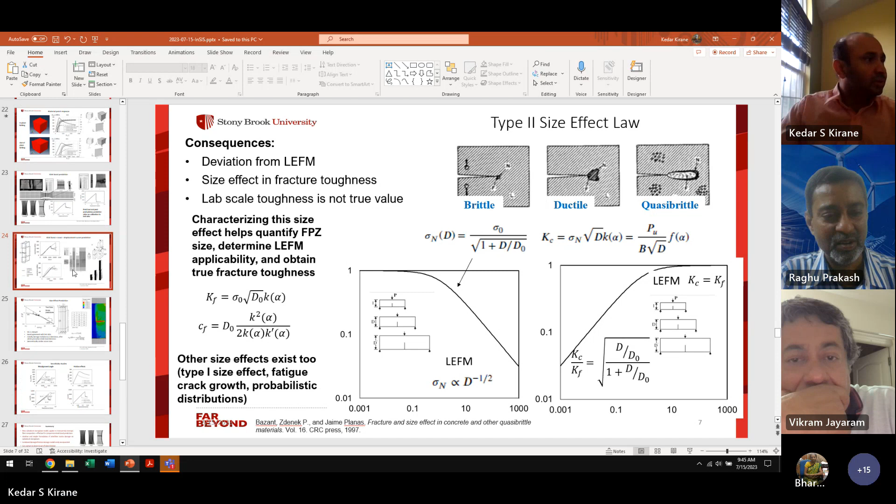So yes, it is more challenging than tensile failure. There is first the stability problem where specimen thickness matters. Length also has to be adjusted, otherwise it will overall just buckle. We want to avoid overall Euler buckling, and we have these stability issues and isolating the damage mechanism too.

Did you have to use any kind of spherical seating for ensuring pure compression during these experiments? Like normally in the case of metals, when I want to do a pure compression test, I would use a spherical seat so that any misalignment in the planes can be taken care of by the spherical seat.

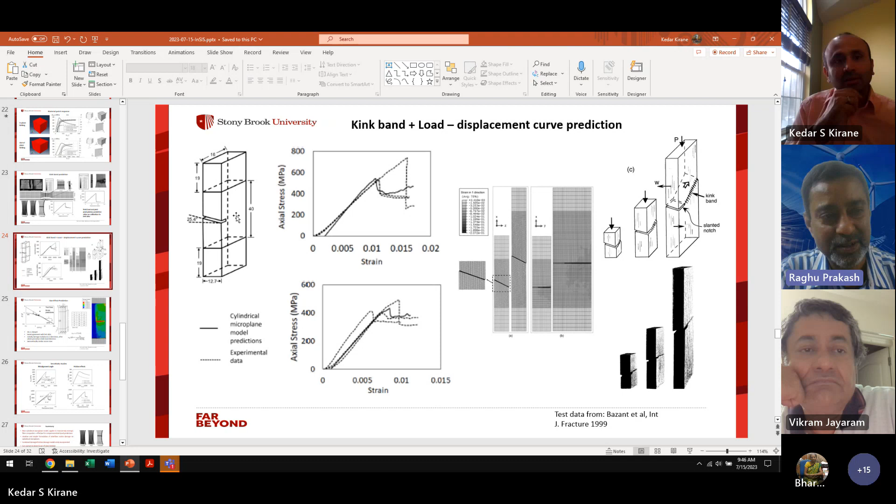Actually, no, we have not done that. There is a fixture called CLC fixture, combined loading compression fixture, which is a combination of end loading and shear loading. That is an ASTM standard for compression tests. So we are using that fixture, not the spherical stuff that you mentioned.

I just remember earlier we used to have that, for the IITRI or something like that, right, the compression fixture which made strict regulations in terms of alignment and whatnot.

Right. Another challenge is, if you do a fracture test and your initial crack is thin, the faces will just touch each other, and then you can't continue with the test. So you have to have a wider notch so that the pre-crack faces don't touch each other during the test. There are many such considerations.

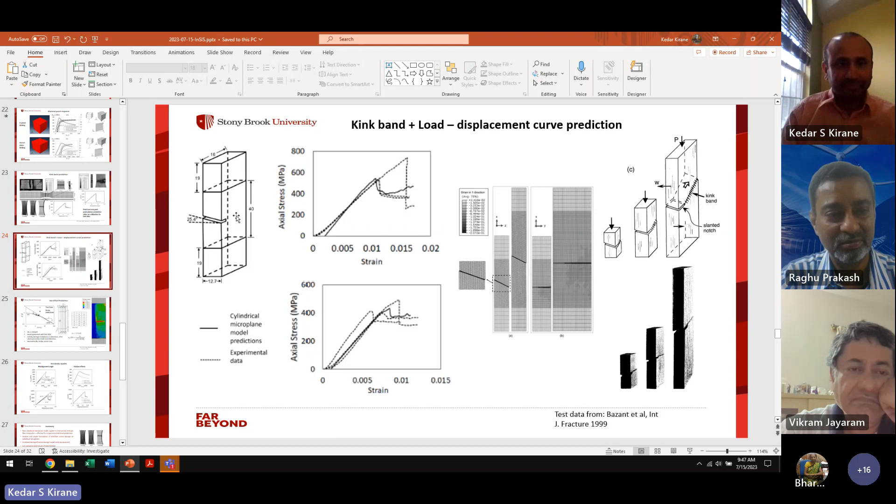I think I don't know if there are any more questions from the attendees. I had a quick question, Raghu, if I can.

So in rocks, sometimes when you have shear planes under compression, you get shear instabilities, but then there will be a mode one which causes it to kink at an angle more or less parallel to the loading direction. Is that sort of thing seen here? Because then the eventual failure, if you have both combined compression and tension in different planes, can still be by tension, but the compression sort of triggers the initial flaw.

You're right, but I don't think these kinds of failures have been seen here. For rocks, the issue is they are very brittle under tension, they are very strong under compression but weak under tension. So the cracks will prefer, even if they start under shear, to eventually go to mode one. But for composites, they are very strong under tension, so that usually will not happen.